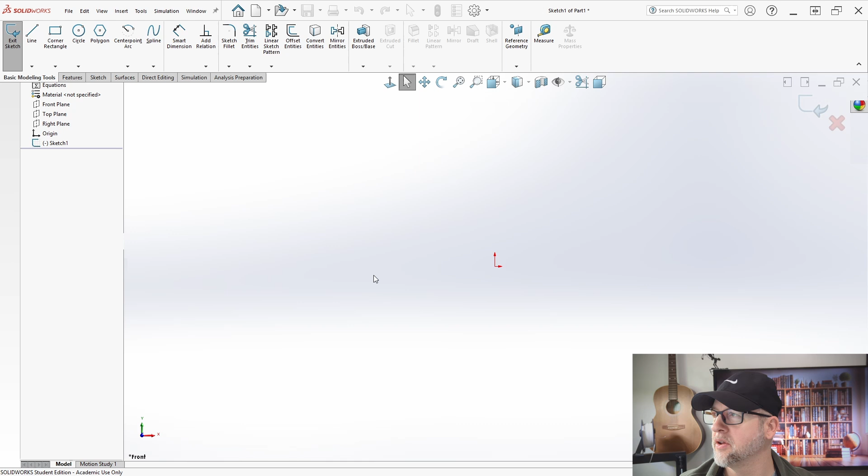So right now we're going to go to File, New. We're going to do New Part. All right, so let's get started on this. We will start with, we're already in a sketch, so we will start with a rectangle. So let's go with a 3-point center rectangle.

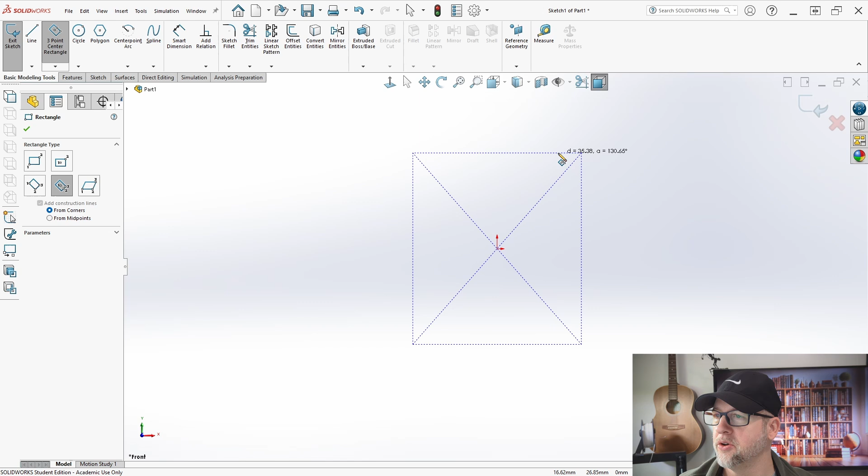Let's get into my top view right here. Okay, so I'm going to click right there, and I'm going to click. We can adjust these as we want. So we're going to go 36 by 36, and I'll adjust this dimension in a second.

All right, so now we're done with the rectangle, and we can smart dimension this rectangle. So this edge to this edge, 36. Then this edge to this edge, 36. All right, there we are. So now we can exit that sketch.

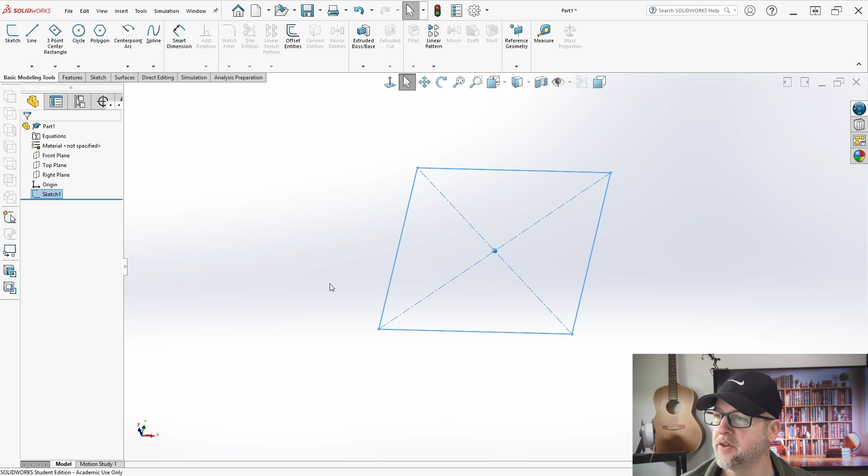We can rotate this. I have a space mouse, so I rotate it fairly easy. I can use my middle mouse button to rotate. So this button right here does some rotations. I can zoom in and out with the rolly mouse button. And let me see if I combine these two. It does a rotation, but it's more like a center rotation there.

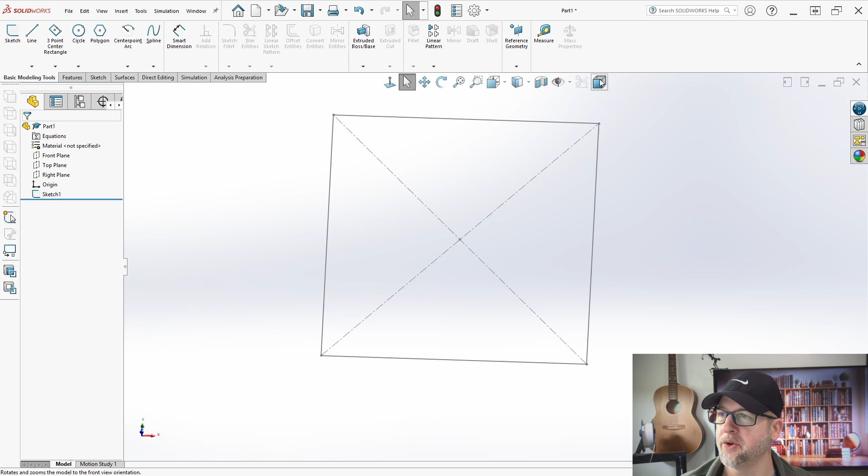I'm going to get in my front view. I put this one right here. I like to see my front view. This is Control 1 if you want to use it. All right, so now we got there.

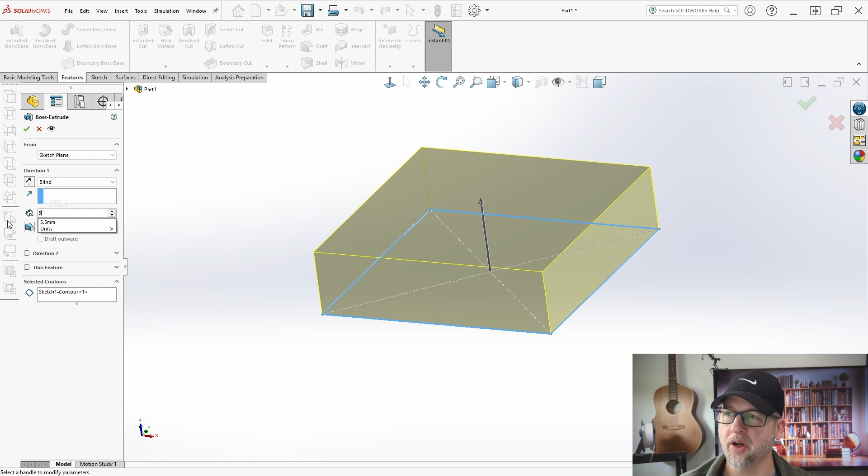Now we want to extrude this guy. So let's go over to our features, and let's go extruded boss base. Okay, we're going to click on select the plane. Okay, we're going to click on all these guys. All 4 of them popped up, and now I'm just going to tell it my distance I want to extrude this, so 5 millimeters. Okay, so now we're going to say okay, green check, and now we got that 5 millimeters.

So now we're going to build another sketch on top of this. So we're going to go back to basic modeling tools. We're going to go to sketch right here. Everything derives from a sketch pretty much. So we clicked on there, and then we're going to build some lines.

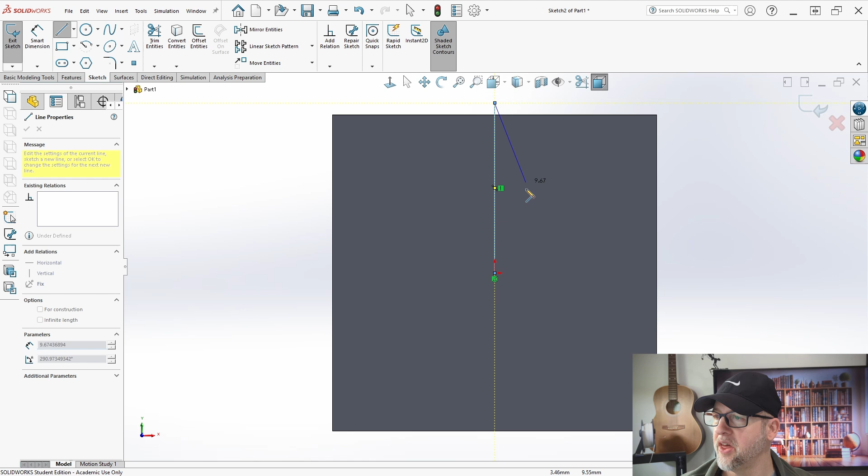We're going to try to go from the dead center up here, and then we're going to hit L to get out of there, L to get back, click on this guy again, and then go over here, L to get out of there. So we are creating our starting points basically.

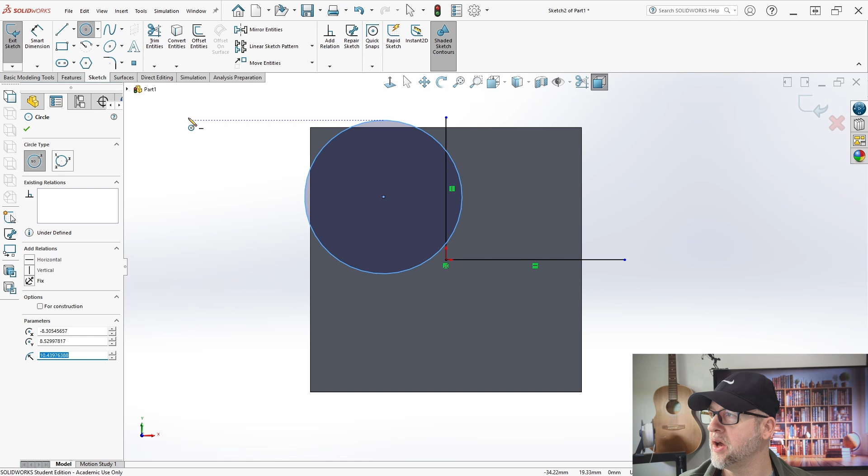So now we want to create our first circle here. So we're going to choose our circle, and we're going to go with that's big enough. I think we can now do a dimension on this guy. Click OK, or actually we can go down here and put 18.65. I'm going to go in and push divided by 2, and that's exactly what we want.

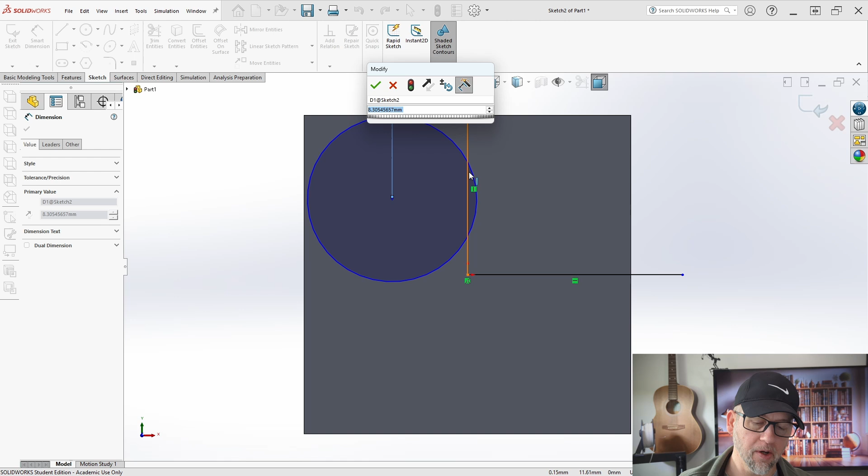Okay, so now I want to position this guy, so I'm going to use a smart dimension. I'm going to go from this wall to this point right here, and that's going to be 18.6 divided by 2. Okay, so it's 9.3, and now we're going to do one from here to here. So 9.3. All right, and now we wanted to see it.

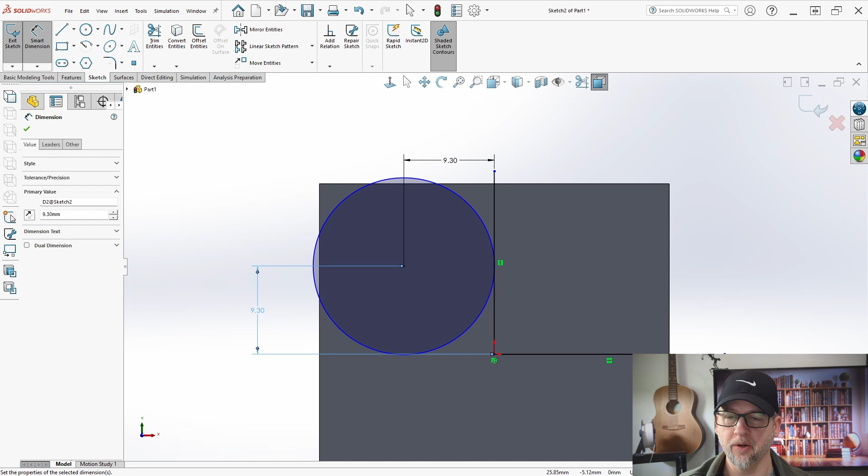We want to see it overhang a little bit, because if we don't have it overhanging, with all 4 of these, it will cause a very feather edge and won't allow us to do it. All right, so next we are going to take this circle and we're going to mirror it to the other side.

Let's click on this green check right here. We're still in the sketch, but now we're going to do mirror entities. We're going to click on the entity to mirror—this is our entity—and we're going to mirror it about this line right here. Okay, and there we are. Now we're going to click on the green check.

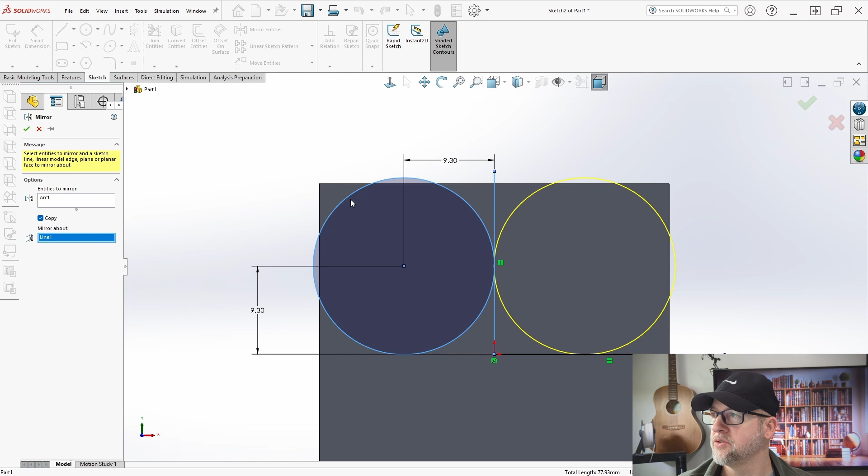Good to go. Next one, we're going to do another mirror. So mirror entities: we're going to click on the entities to mirror this guy. And if you overclicked or clicked something wrong, you can always right click on this and say clear this selection, or delete.

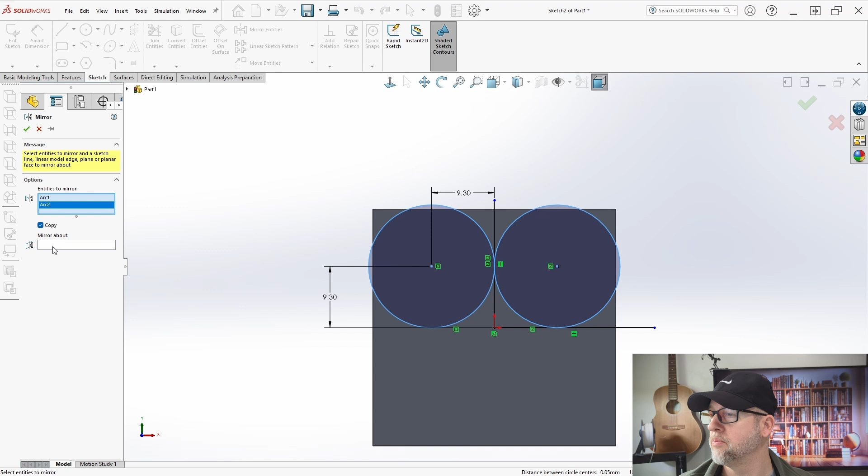Okay, and then we're going to go to mirror about... it was for some reason stuck. All right, and there we go. Now we have everything mirrored and everything should be perfect.

So next we can finish this sketch and do an extrusion and a cut. All right, let me rotate this and look at this side.

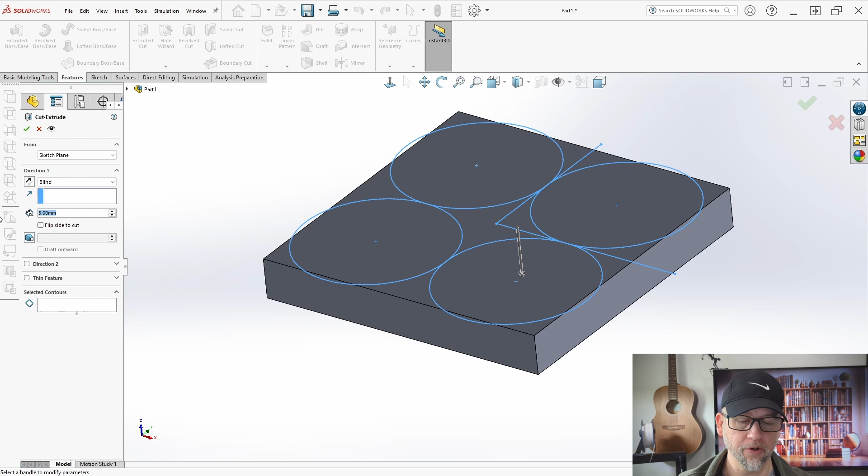Now we're going to go to extruded cut and go down 3 millimeters, so just 3 here. And we're going to select contours: right here we click contour 1, 2, 3, and 4, and now we say okay. That automatically subtracted it out because it was a cut extrude, okay?

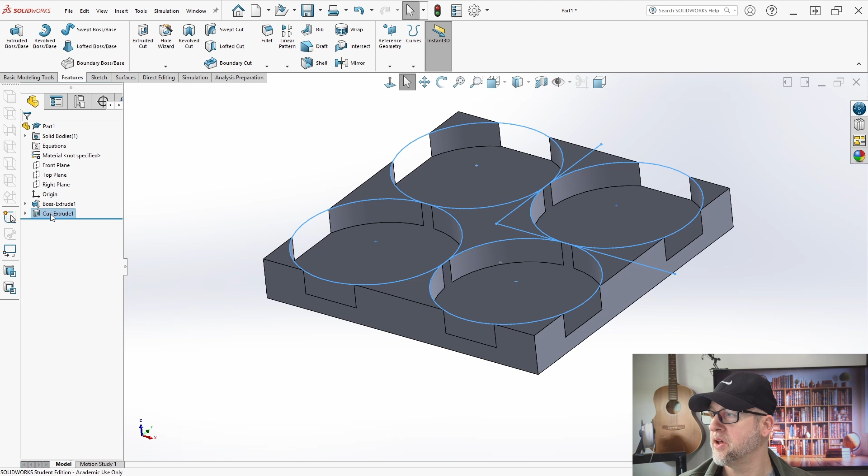So if you chose extruded boss base, you could do it that way also, and I'll show you that in a second. Let's delete this guy. So now if I want to extrude those and subtract them, I'll show you that method too.

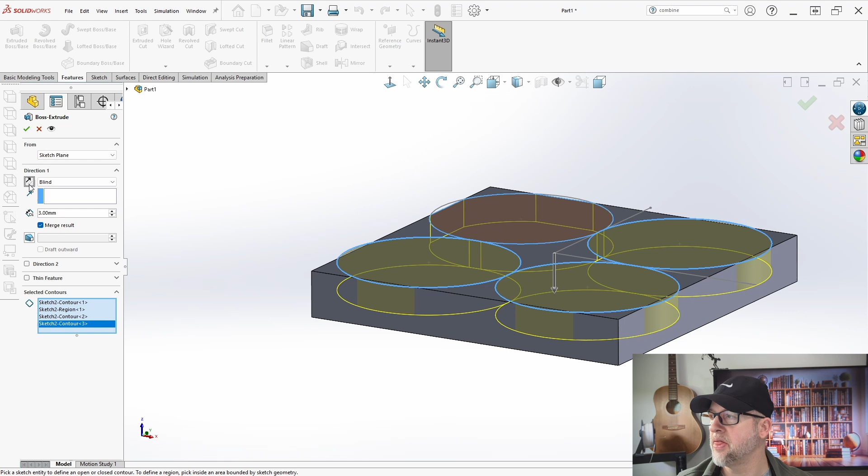So this one's: choose your pieces, choose your entities, and then we select contours here—1, 2, 3, 4. Here we choose, we want to flip it, so click right here. And then we want to uncheck this. This creates the bodies, okay—just the bodies, doesn't merge, doesn't subtract or anything like that, just creates the extra bodies. Say okay. Now we have 5 total bodies inside of this part.

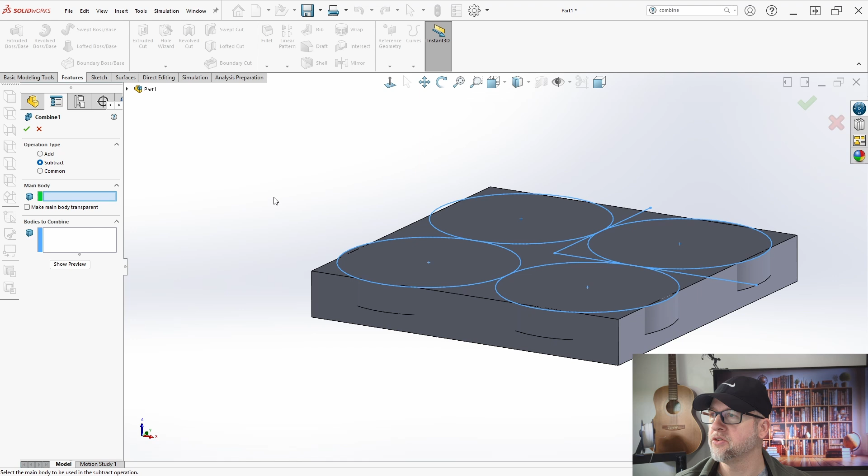So now we want to subtract this out. We go to insert, features, and all the way down here to combine, and this is where we can actually subtract it out. So what's your main body? This is your main, and your bodies to combine or remove are these 4. They're all connected, so okay—and that's the second way of doing it, okay?

So now we want to flip it over. We want to create a sketch on the back side now. Let's go to basic modeling tools, sketch on the back side. We're going to click on this face right here. And now we are in there, we have a sketch going on.

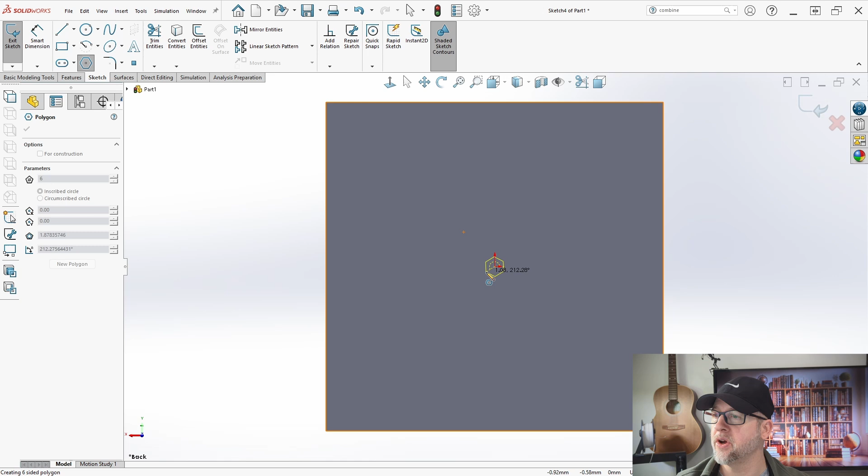So now we go over here to our polygon. We're going to click on our center point right here and drag it out. We can actually modify this by going over here—I'm just going to drop a number down there and slide over here, and we're going to say this is going to be 6 millimeters. And then, yep, 180 sounds good. So it's got 6 sides, which should be good.

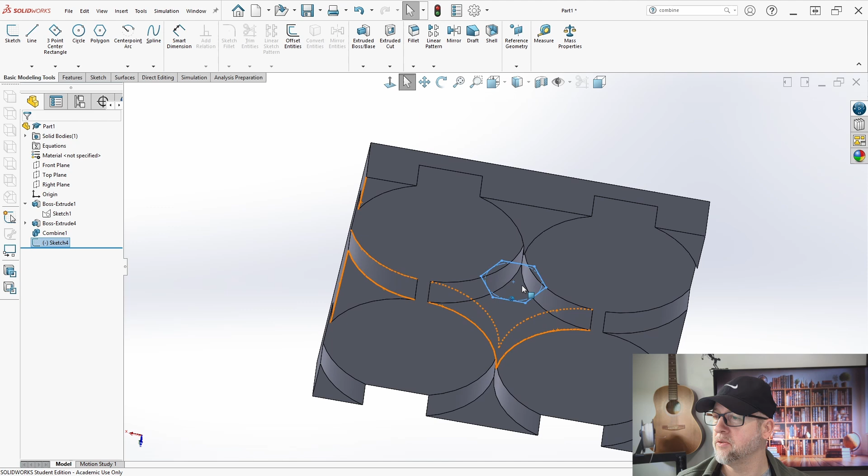All right, so exit that sketch, and then we'll take a look at it. Yes, it looks good. Sometimes it will be like double the size, and that's if—let's go back in here, right click, go to edit—so it hid that hex, never mind. It's all good. All right, so we're good.

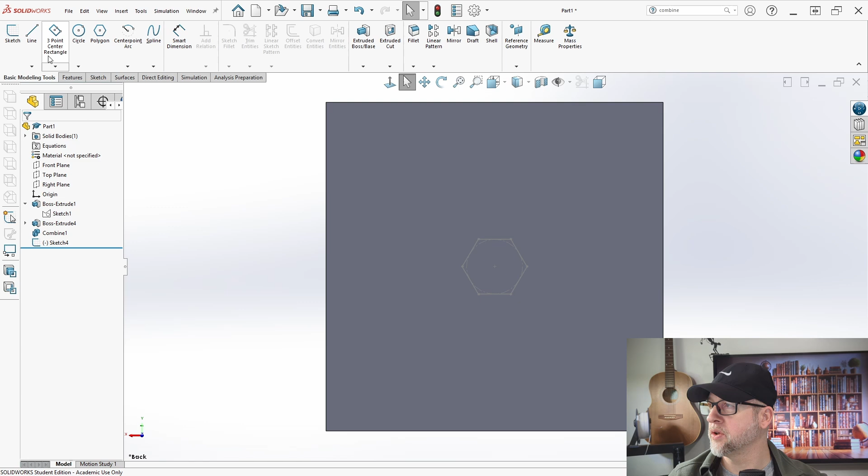So we're going to finish that sketch. Now we want to do an extruded cut, so let's click on extruded cut. Let's click on what we want to extrude—so it's this sketch right here. It automatically selects the rest, and we are going the right direction, so we're going 3 millimeters down and everything looks good.

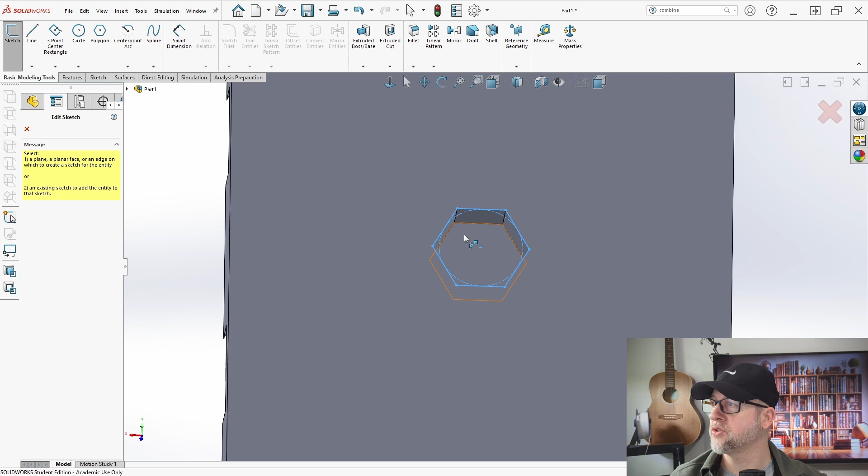Okay, good to go. So now we're going to create one more sketch inside of there. Let's go to basic modeling tools, sketch. Click on this guy, click on the circle.

We're going to click on this guy right here as our center point, and then our diameter of that circle is going to be 3.5 total diameter. So we could put that right there. And then this is, let's say 1.75, should be good. That will equal 3.5 diameter.

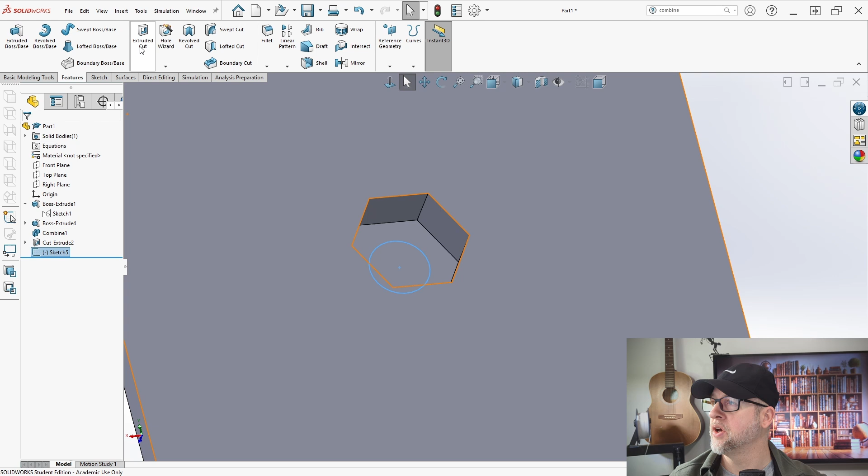All right, so now we're good there. We're going to hit exit this sketch. Now we're going to go to features, and we're going to do an extruded cut. We're going to grab this, it already grabbed it automatically, and we're going to take it through the entire surface, entire part. Yep, that's good to go.

And if you want, you can grab this and drag it down and remove more if you wanted, but there's nothing else to remove. So click OK, and that is the hole for my bolts to go through.

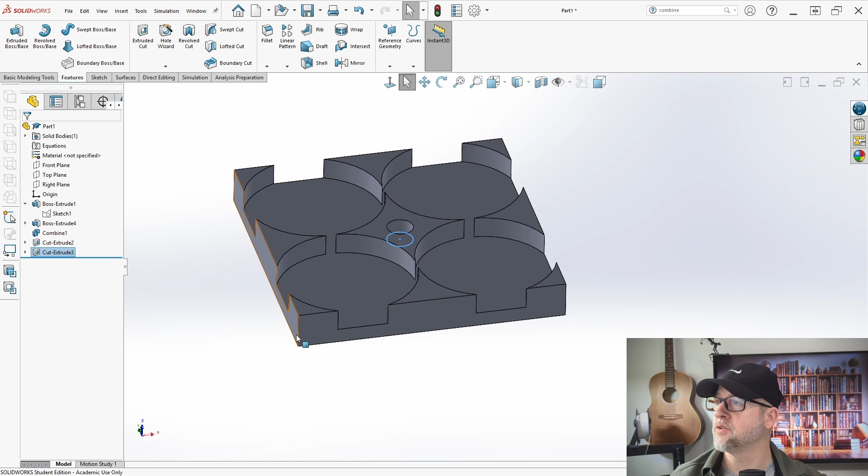Now we can put on some round fillets here. Let's make this look a little prettier. So we'll click right here on this edge... rotation, edge. It didn't click that for some reason. Click there, click there. And if you accidentally click too much, you can always right click on this and clear the selection or do whatever you want.

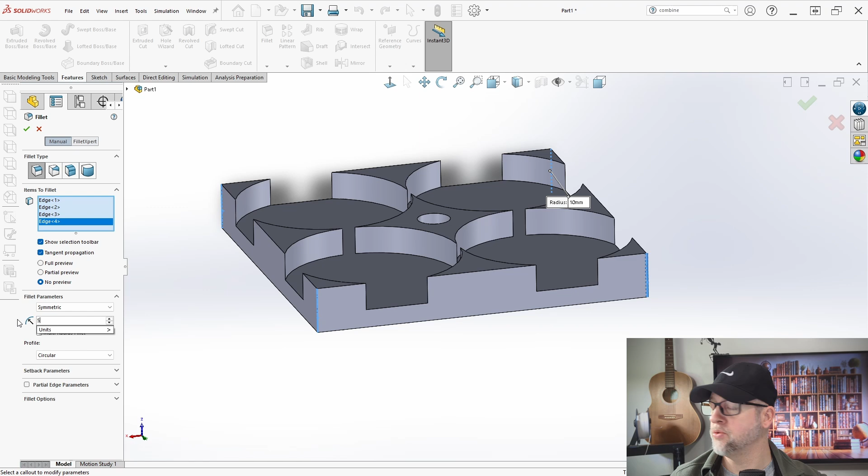So it's all good. And then we'll change our size to, let's say, 5 millimeters. And we can hit OK. And it has moved them in.

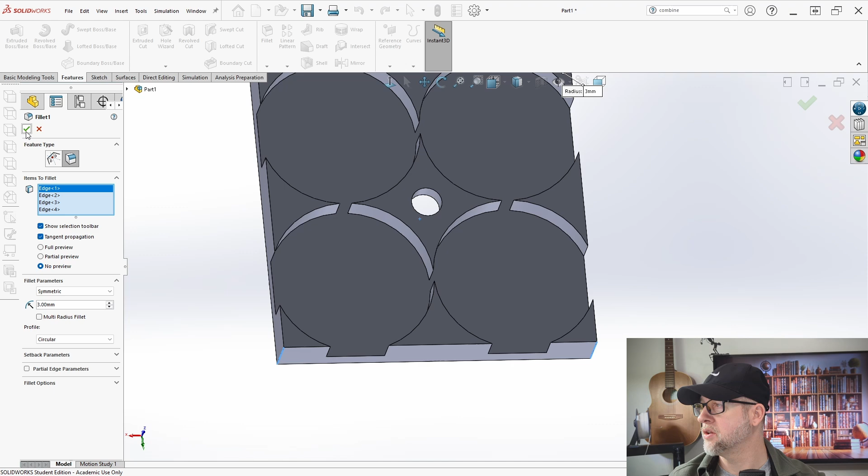Now it looks a little bit small. That's okay, I mean it's going to be 3D printed, but if we wanted to change that, we would right click on this guy. We can go to edit that feature, and we can change this down to, let's say, 3 millimeters. Let's change it to 3. And then it will automatically update once we hit that green check. And there it goes, so down to 3 millimeters. So that is one side of my battery holder.

As I said before, you could find the other videos. One is using Onshape, and the second one is using Siemens NX, and all three show you how to build this. So you decide which one's the best. Each has its pros and cons, and some are more simple than the others.

I would say Solidworks was a good winner, pretty darn close to Unigraphics. I think I went faster with Unigraphics. I think Solidworks was a good second runner. I believe Siemens NX was the best, but here's my issue with Siemens NX: you can only export this out as an STL. You can't actually export this out as a step model.

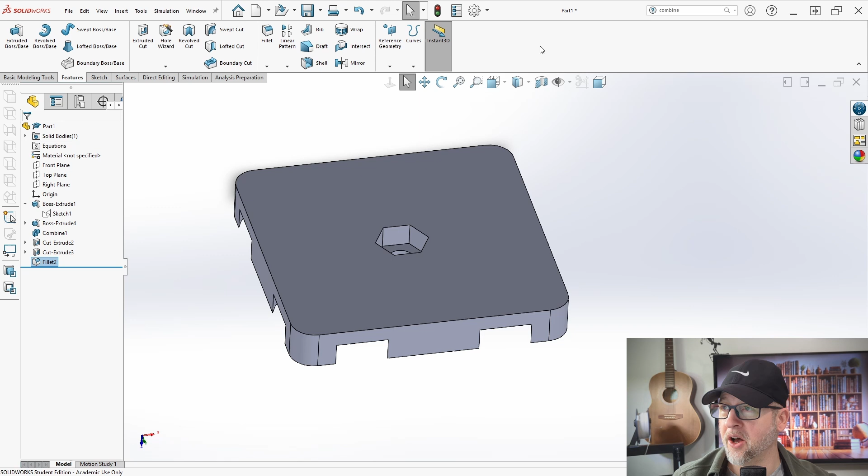So I kind of like what Solidworks has done here. They provided a full license, a full student license for a very low cost for students and veterans.

So if you want to get this out of Solidworks, you do a file. I'm just going to save it first, and then after I save it, then I can do a file export, or maybe a file save as again, and I can change my file format to be anything I want. So I can do parasolids, I can do, what else can I get through here? DXFs... let's see, should have, there's your steps.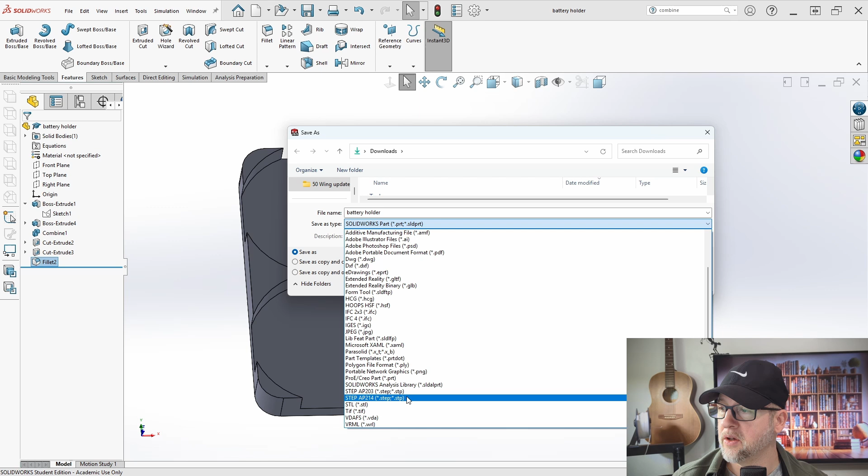Okay, and STL. So if you want to get this out and 3D print it, we export it out as a STL, save. I'm going to put in here Solidworks, enter, and that is saving as a STL, all bodies, yep. And now I can take that 3D body, an STL file, and throw it into my Cura software or whatever slicing software that you like.

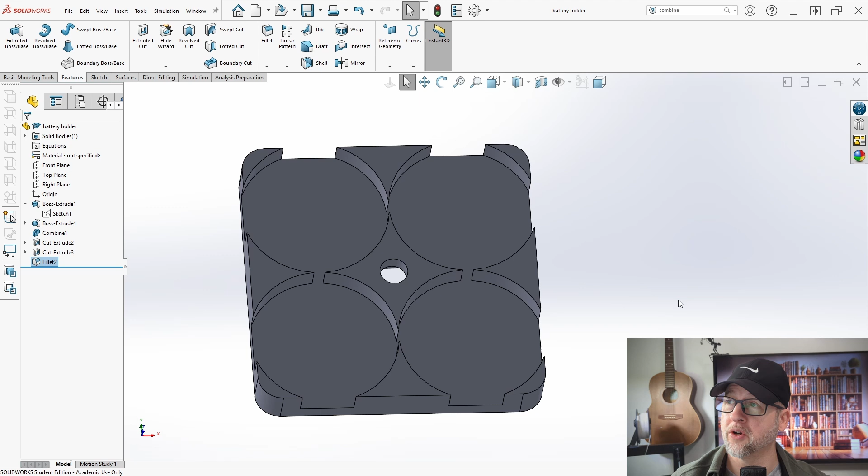So I hope this video was beneficial, taught you a little bit about SolidWorks, and all three of these videos are building the same thing, and they are comparing the functionality of all three CAD systems. You make your own choice, but I think SolidWorks is one of the better ones. What I love about Siemens NX is I have used it for many years, so I'm very familiar with that and how it works. So I'll be playing around with these three CAD systems.

Let me know what you like, and let me know if there's something you want me to try to cover with one of these CAD systems. Each has its own pros and cons.